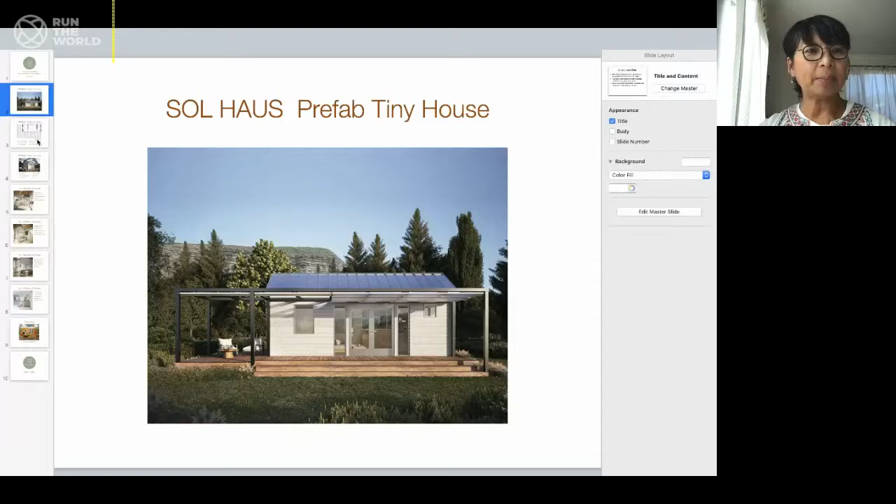So this is the exterior of the tiny house, and it's about 26 feet by 10 feet, and that's the footprint of the house itself. And talking about the floor plan, there's an exterior deck, and this is the footprint of the tiny house, which is, as I said, 10 feet by 26 feet long.

And talking about the design of it, which is the emphasis of this presentation, is making sure that the floor plan is efficient. So one thing that I really concentrate on is an open floor concept so that it doesn't have a lot of mass inside that obstructs the view. And that the circulation, which is the way that you travel around in the house, is very clear in the diagram. So for instance, the main entry is almost off to the center, and the circulation, which is the way you travel from one room to another, is clearly just along this space.

So as soon as you enter, there's the living room and the kitchen. So that's a big, great room right at the center. And then on the left is the bedroom, which is on a platform bed so that it doesn't take up that much room around the bed. So you enter in the bedroom, and then on the other side is the bathroom, and basically you have the sink, the toilet, and the tub shower right off of the end. Again, it's an open floor concept so that there's a minimal amount of walls to close in the interiors.

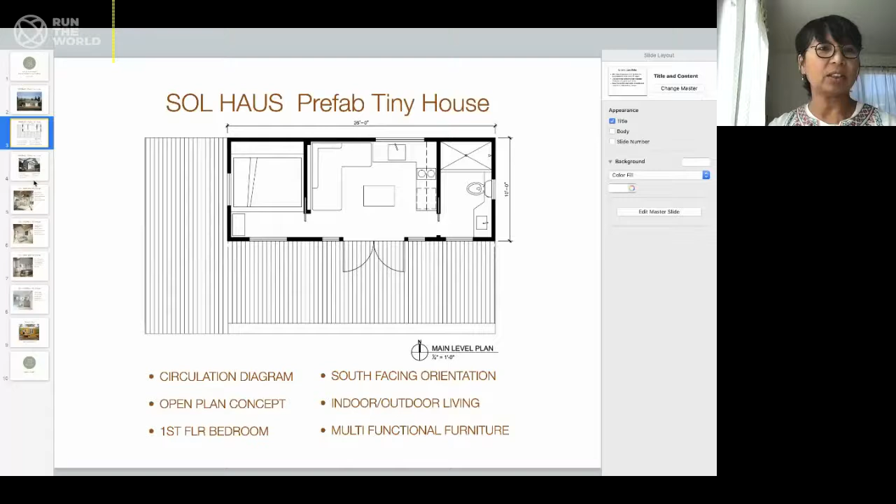So one thing about this tiny house is that, as I said, it's legal as an ADU, or accessory dwelling unit, or a primary dwelling. A lot of the tiny houses that are being legalized now, especially all over California, with Dan Fitzpatrick doing a lot of the advocacy work, are ADUs, a guest house meant for the back of the main house. But this one you can actually use as a primary dwelling as well. This permitting process is with the state, so it's very fast and efficient. And it's also factory built off-site so that it could travel from the factory to the site where it's going to be located. So it's a lot more efficient in terms of permitting process.

The structure is very energy efficient and it's fire resistant, because in California there's a lot of fires going on, really all over the country. So I wanted to make sure it's fire resistant with the building materials. And it is also mobile, so you can move it from one location to another, even though it's on a permanent foundation. I designed the foundation so it could be removable.

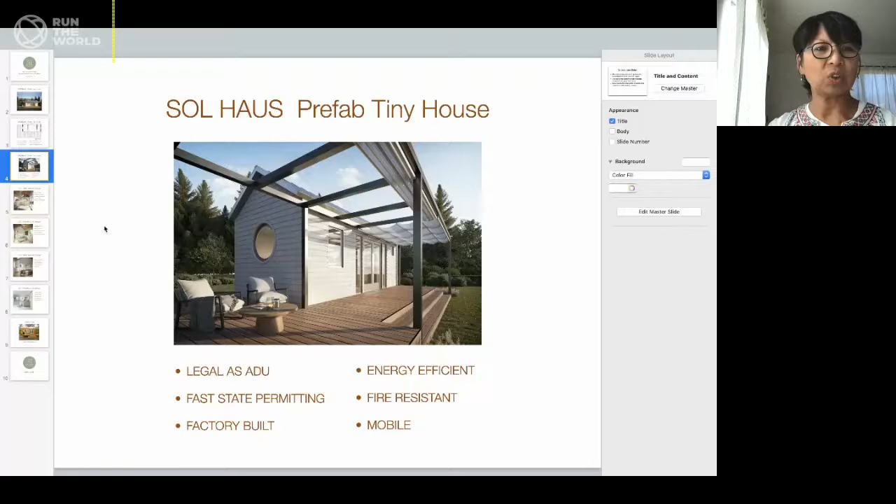Now, the interior of the tiny house: if you go from the main entry here in the double doors, you can see that the kitchen and the living area is very open, and there's a lot of natural light coming in from the entry and also to the back where the kitchen is. And there's also skylights on either side. So again, there's a lot of natural light bathing the interior. And another trick for making things feel really expansive and large within a small space is using very light colored materials.

So you have white walls and natural pine ceiling and very light wood throughout the space to make it feel brighter and bigger. I also have vaulted ceilings throughout the main space so that you can increase the maximum height of the structure, making it feel a lot bigger.

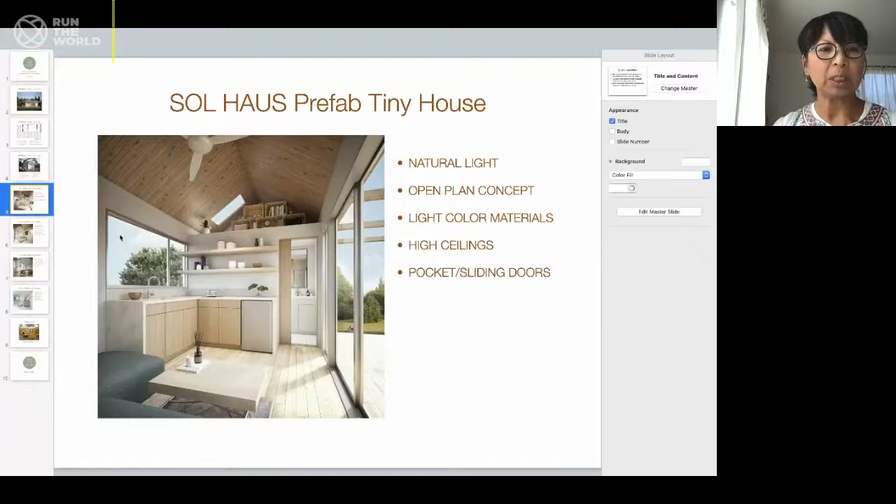On both sides is the kitchen here, obviously, and the bathroom. And on the other side is the bedroom, which has pocket doors, so it really minimizes the amount of space being used for door openings. On the other side of the great room is this bedroom, again with a pocket door. You have a lot of open shelving, so it doesn't feel like a closed space with storage.

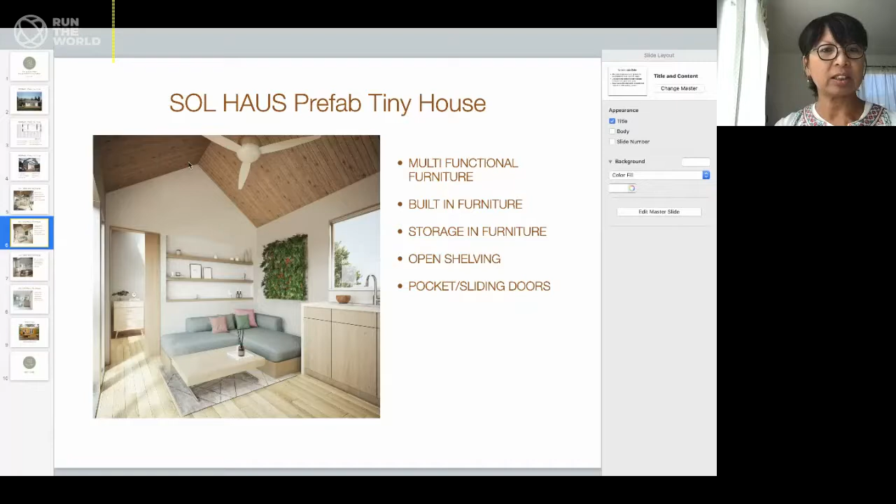And there's storage inside this sofa that becomes very functional for putting pillows and blankets, and guests can sleep here too because it's a decent enough size for one person to sleep on. And this coffee table can be on a height adjustable mechanism, so it could be a coffee table and a dining table. Again, you have the really tall ceilings with the vaulted ceiling on the gable on both sides of the tiny house.

This is the bedroom. One great thing about this model is that the bedroom is on the first level, so there's no need to climb up any stairs or ladder. This bed is a queen size bed with plenty of storage below, and again there's shelving above that doesn't feel closed in because it's open shelving. And I do offer a loft above the bed so that you have additional storage above the bed as well. So you have plenty of clothes storage and blankets below the bed as well as above on the loft.

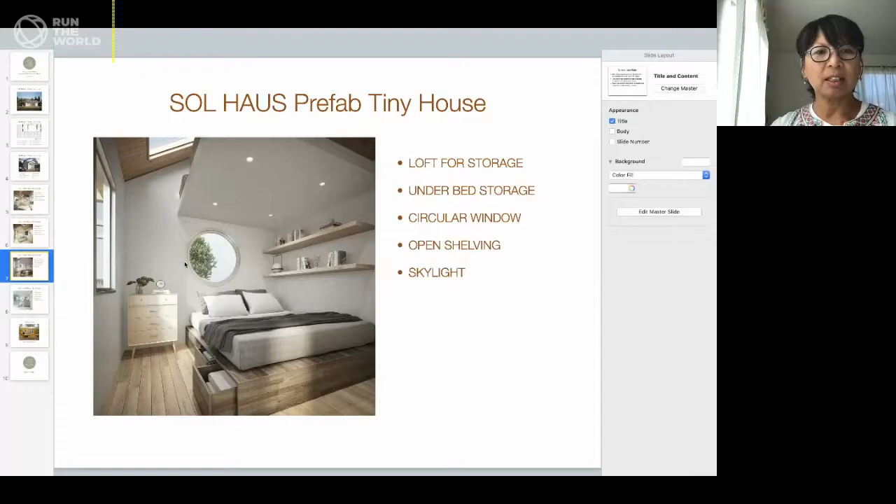And again, a lot of natural light comes in from the ceiling and also adjacent to the bed, and this beautiful circular window offsets the rectilinear design overall of the space. And then in the bathroom, I have very light materials again used throughout. There is again the circular window mimicked from the bedroom on the other side. So it feels very spacious for a bathroom, and it's a walk-in shower.

The tub usually takes up a bit of space. So this is a walk-in shower where you can just step up, and the tile is an accent color so that it gives a little bit more interest within the neutral colors of the interior. And the shower is very light and airy, so there's just a glass enclosure without a door. There's a rain shower head so that it feels really luxurious inside, and there's still plenty of storage within the base cabinet here underneath the sink.

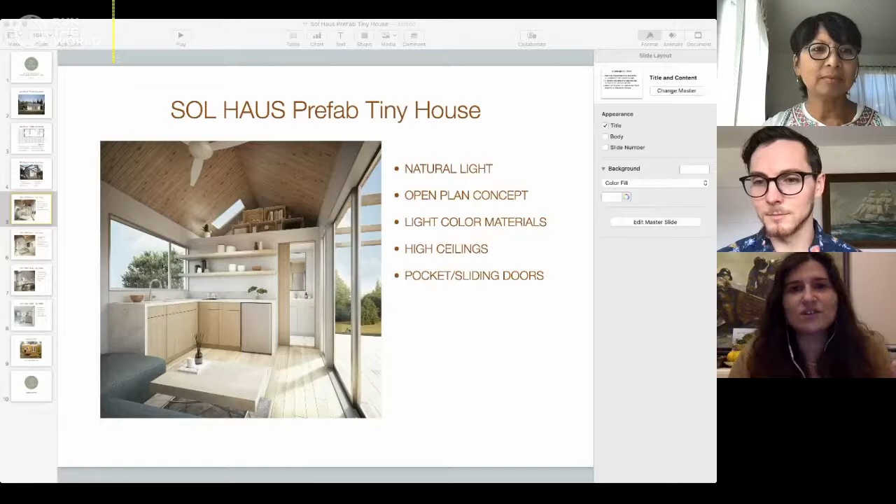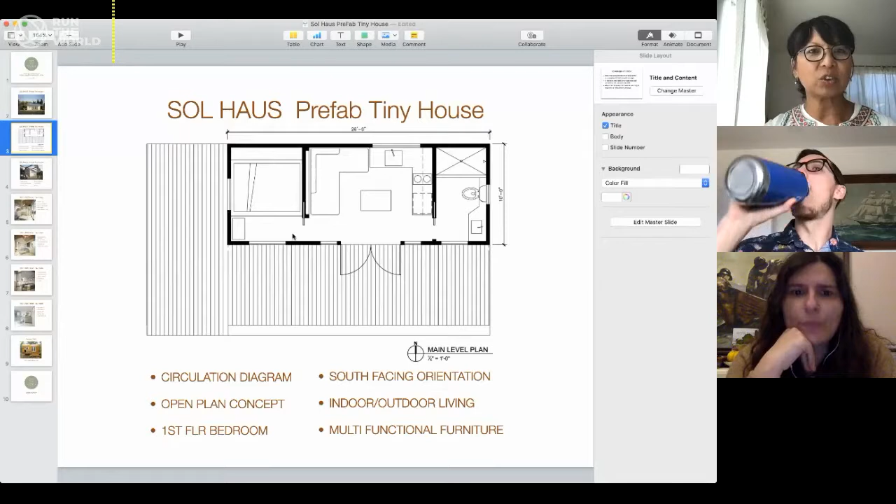Okay, perfect. I just wanted to ask about the static weight that all these walls are carrying, and you made them all glass. It looks great, but how about the calculations behind it? So I'm going to put this image on. It looks like there's a lot of glass, but in reality, a lot of what you're seeing is just within the front elevation, the front part of the tiny house, because that's south facing. So I want to get as much natural light in, but not direct heat gain where it really heats up inside. So the openings I have are really controlled.

Let me see if I got that. So the openings are not as large as you may think. It's just at the front. So a lot of it is really solid. If you look at the back wall, most of that is solid, and on the sides it's mostly solid. It's just really at the front.

So again, at the front there is a big giant steel beam that serves as the moment frame, and then these solid walls, the engineer is designing right now, but I think it's actually mostly wood. So it just depends on the header. The header on this one is probably 8 feet wide, so it's going to be a bigger header than the rest of the windows. So it will completely withstand the wind load and seismic requirements for California.

Okay, and considering that, how did you manage to have those ceilings broken? Because then you only connect them on 3 or 2 sides. So how did you manage to make them that strong? Yeah, that's another good question. I actually thought it would require truss roof systems, which have members to support it on the top. But the engineer was able to design the roof so it doesn't have to be a truss system.

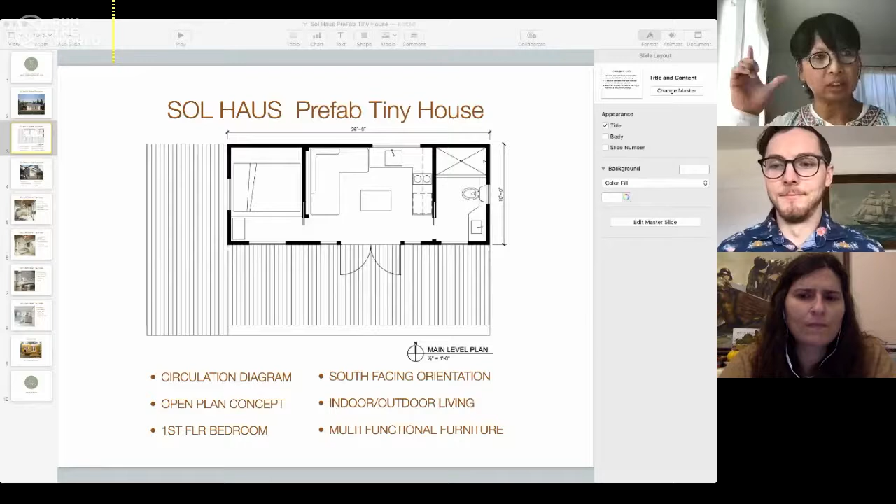So we'll probably have a thicker roof and thicker floor, at least a 2x6. So the insulation values at least probably R20, R30. And so, because we need to meet Title 24 requirements, and I'm planning to have it for the worst climate zones. We'll test it out whether or not those R values are sufficient for the worst climate zones, but I believe they should be at R19, R20, R30 at the minimum.

There are these kinds of engineering software. So when you put your data in, they actually give you all this information. Are you using that kind of software? Which is my last question. Sorry for taking up your time.

No problem. I'm not using it because I'm not the engineer. The Title 24 engineer who calculates all the required R values for insulation is supposed to be doing that. They're required to do that to submit for state permitting. So that's not my expertise. I give that to the engineer who does the Title 24 to make sure it will comply for the specific location. I see. Thank you so much. Thank you. You're very welcome.

All right. I'm going to go ahead and let Steve in here real quick. Thanks so much. We'll talk to you later. Hey, guys. Hey, Vina. Thank you. Hey, Steve. Two quick questions for you. I'm in Colorado, by the way.

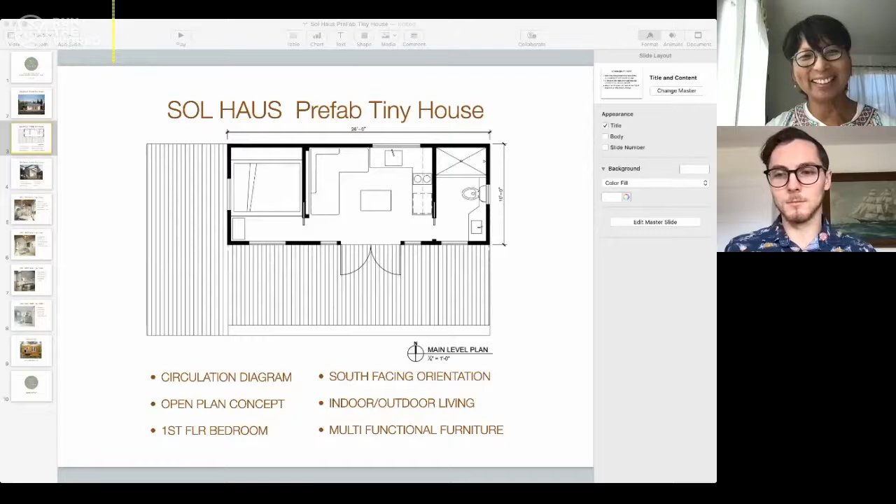Thank you. You're welcome. You may hear from me again. Excellent. Would love to hear from you. All right. Anybody else want to grab the mic? I don't know entirely how to pronounce her name, but Asli Han asked to grab the mic again. I'm not sure if she meant to. Okay, yeah, I don't think she had meant to do it again. Anybody else want to grab the mic? We've got some more time and obviously lots of questions. So, there we go. All right.

Somebody should be coming on in just a moment. It's just loading in the system or something. Thanks for helping, Zach. Of course, no worries. Yeah, it's fun being able to interact with the attendees live and in person. So yeah, definitely. I like engagement. Yeah, for sure. It's just the technology sometimes. Yeah. It's not easy for me. No worries. All good. All right, somebody else is coming on right now. Or should be. Joan. Oh, we got a lot of people asking now. Joan, are you able to get in, Joan? Maybe I'll try somebody else as well. Mark should be trying to come on right now. Or Lee. Let's see. There we go. Looks like we got Mark on here. Can you hear me? Yes.